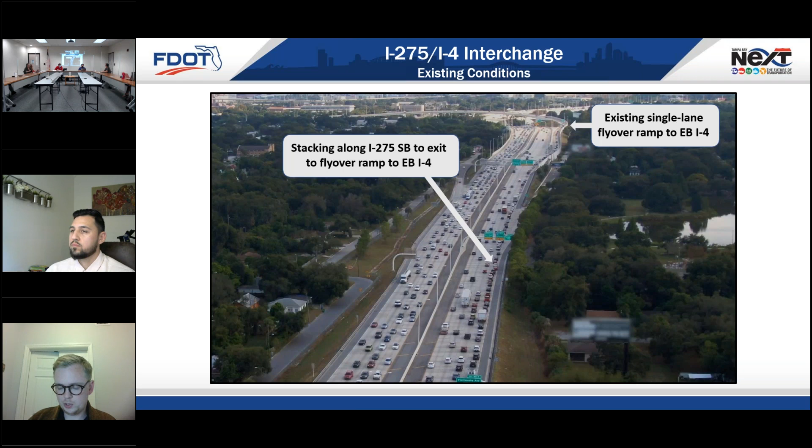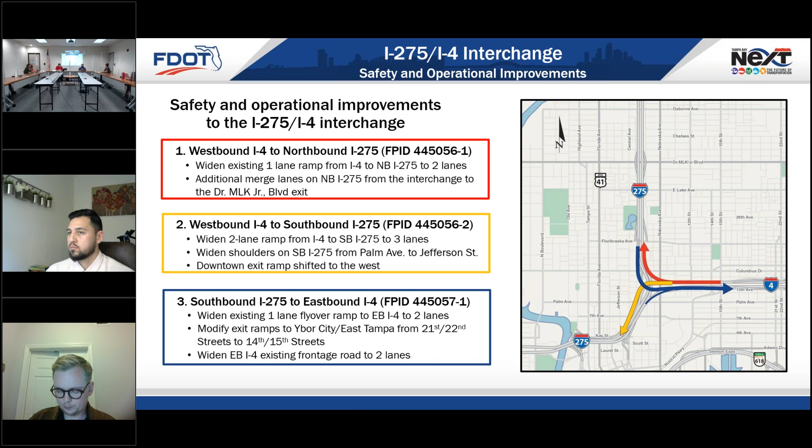These quick fix safety and operational adjustments will reduce the previously stated lane weaving and speeding, the congestion and lining up for the I-4 exit, and improve access to the local exits.

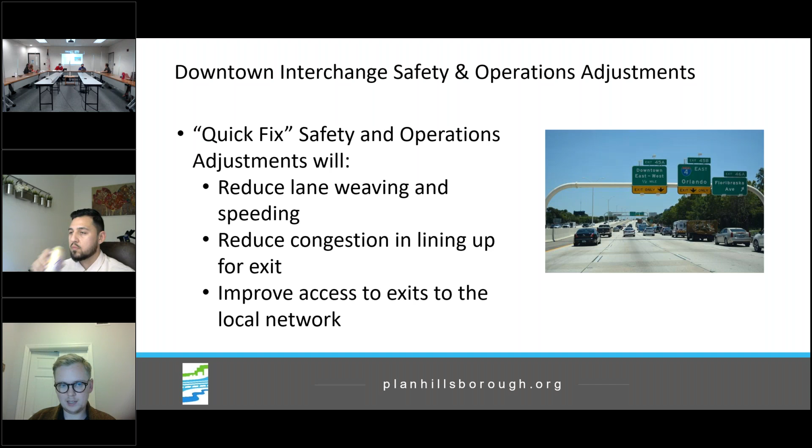FDOT is measuring that the downtown interchange will reduce deaths and serious injuries on I-275 near I-4 by nearly half, and a 14% traffic reduction on local streets.

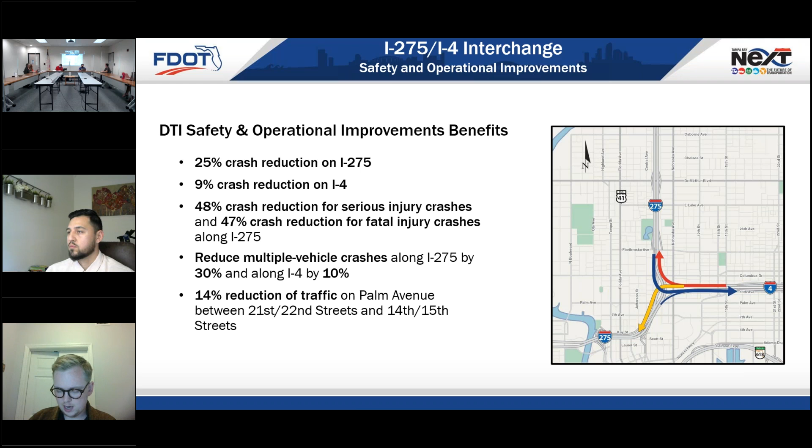Continuing on the topic of traffic reduction on local streets, the downtown interchange is also planned to improve connectivity and safety on the local street network below. There's a proposed trail system that will connect the Tampa Heights Green Spine project to Ybor and Encore development. Further, these improvements will complete streets under the interstate to connect these communities.

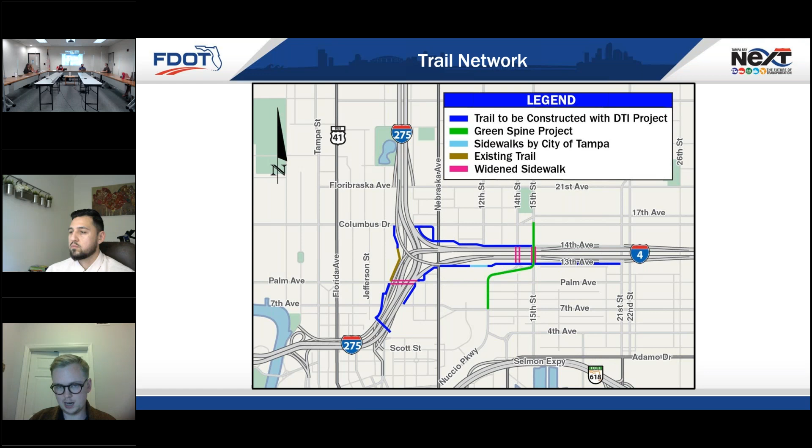The TIP amendments also intend to relieve some issues on the local network, like drivers driving too fast on and off the interstate ramps and difficulty seeing at night. Some mitigation strategies include reduced lane widths and having a high emphasis on crosswalk markings on 14th Street from Columbus Drive to 14th Avenue and 14th Street from 14th Avenue to 13th Avenue.

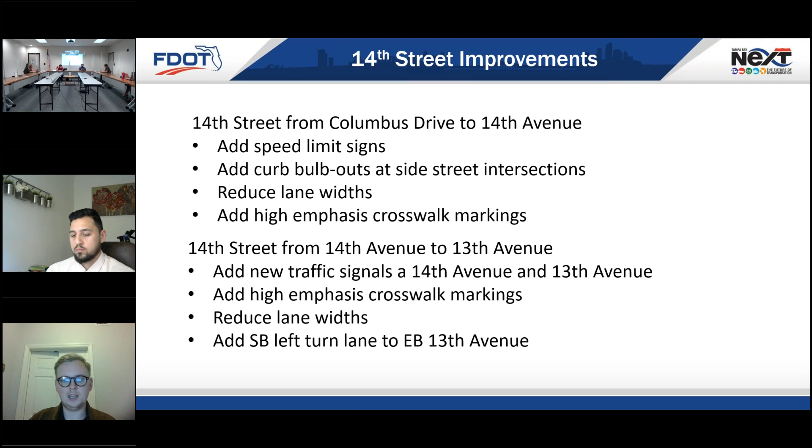This slide shows the typical street sections for 14th and 15th Street. While FDOT is responsible for working on 14th Street, the City of Tampa has plans to improve 15th Street through a green spine project. These changes include sidewalk width changing from 5 to 6 feet and lanes being narrowed.

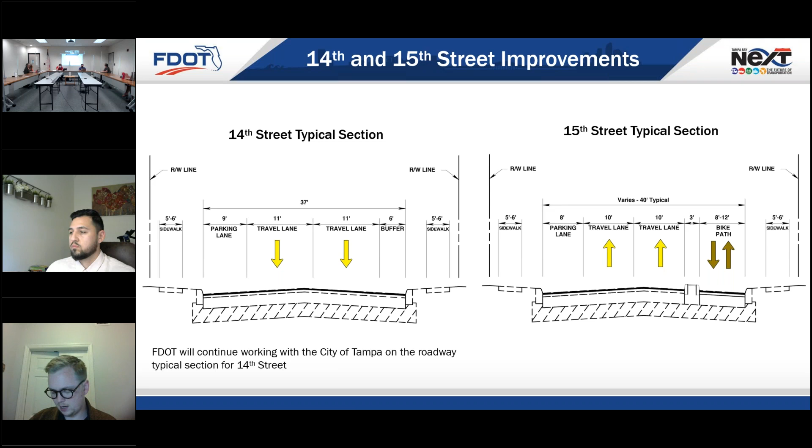So this is the first amendment. This is what was adopted and then amended for roughly $26 million. It's amended from right-of-way acquisition to right-of-way and utilities, preliminary engineering, environmental care, and design build for a total of $26 million. This section is the westbound I-4 to northbound I-275.

The next amendment is an addition of $60 million for westbound I-4 to southbound I-275. And the third amendment is the downtown interchange project adding $66 million for the I-275 southbound off-ramp to I-4. These three amendments make up for roughly $154 million.

The next group of amendments make up the West Shore interchange reconstruction preliminary phase. These 5 projects are preliminary projects that make up for 1 out of 4 phases of the West Shore interchange. The West Shore Interchange has been a top regional priority for many years, and the changes are intended to reduce congestion and weaving at the intersection of State Road 60 and I-275. This will also complement the Howard Frankland Bridge reconstruction.

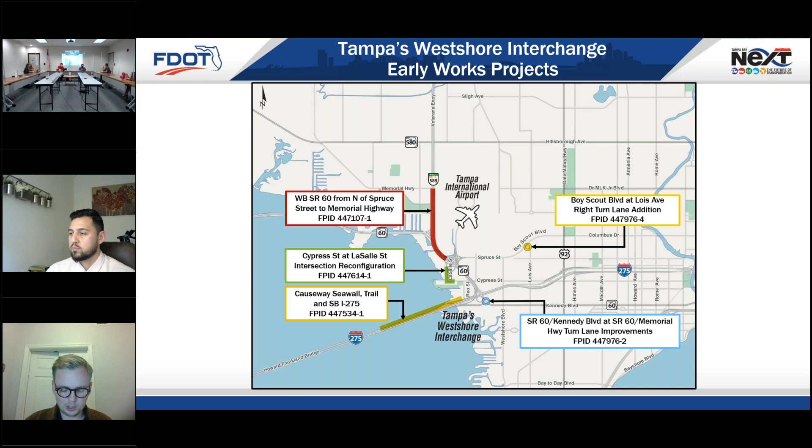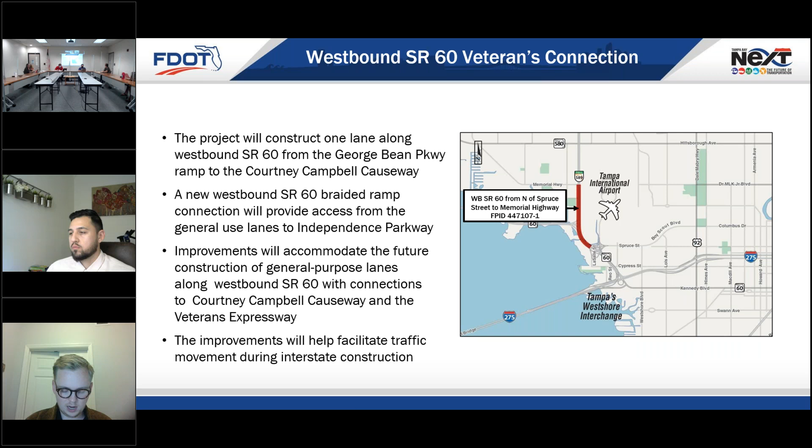The first project, westbound State Road 60, will construct one lane along westbound State Road 60 from the George Bean Parkway to Courtney Campbell Causeway. This project has a total of around $36 million for utilities, preliminary engineering, environmental care, and the design build.

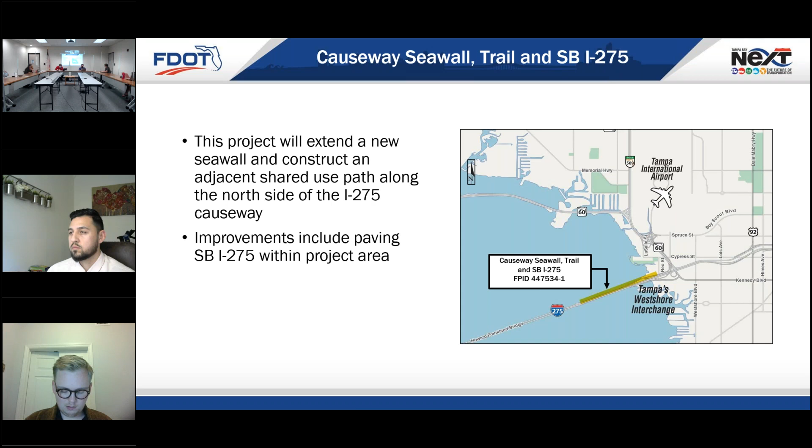The next project in this set of amendments will extend a new seawall and construct an adjacent shared use path along the north side of the I-275 causeway. This project has a total of nearly $37 million.

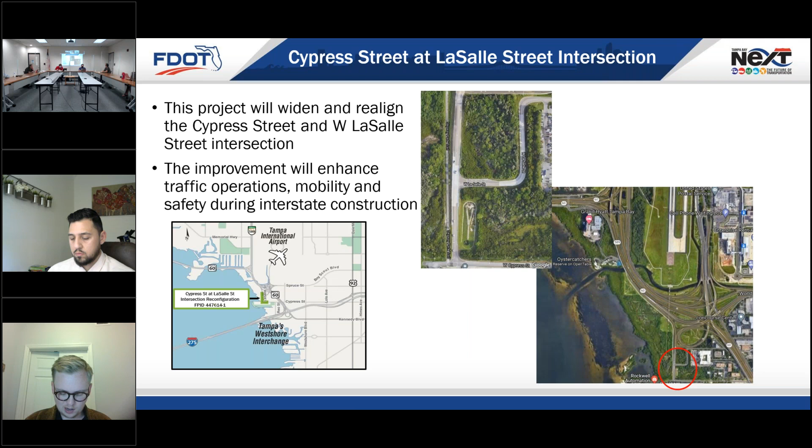The next project is Cypress at LaSalle Street. These two low volume roads are near business parks. They will be widened to enhance connectivity to two off-ramps and one on-ramp to the Westshore Tampa International Interchange. The project cost is estimated at $3.6 million.

Amendment 13 is West Kennedy Boulevard at Memorial Highway. It will allow for the construction of additional left and right turn lanes, one from eastbound Kennedy to eastbound Kennedy, the other from westbound Kennedy to westbound Kennedy. FDOT believes this will also facilitate traffic and mobility during future interstate construction, and the project has a total of nearly $2 million.

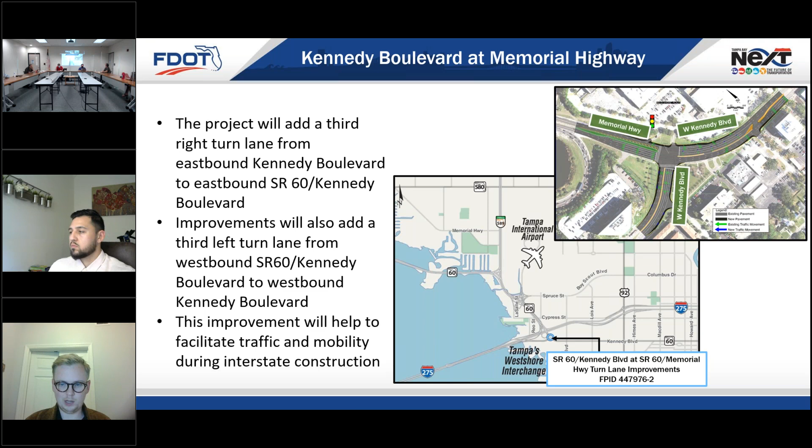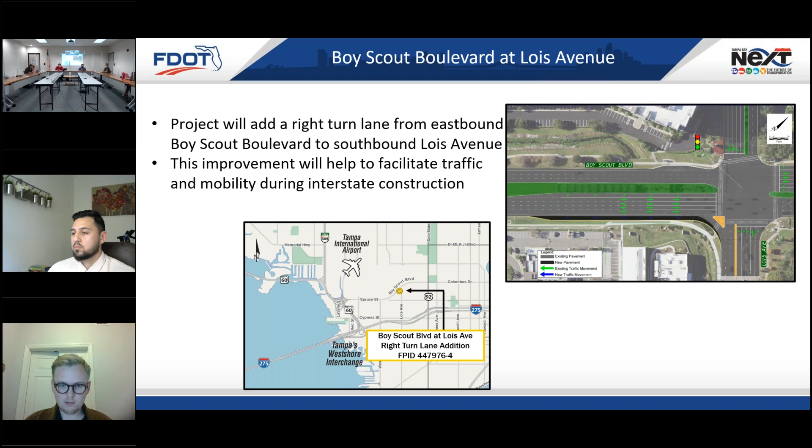The final Westshore Interchange amendment is a project to add a right turn lane from eastbound Boy Scout Boulevard to southbound Lois Avenue. This project has a total of around $527,000.

Finally, the integrated corridor management, or traffic congestion management technology, will allow a traffic control management center to manage congestion among several key corridors. These corridors include Nebraska Avenue, Tampa Street or Florida Avenue, Hillsborough Avenue, Dr. MLK Jr. Boulevard, Boy Scout Boulevard, and Kennedy Boulevard.

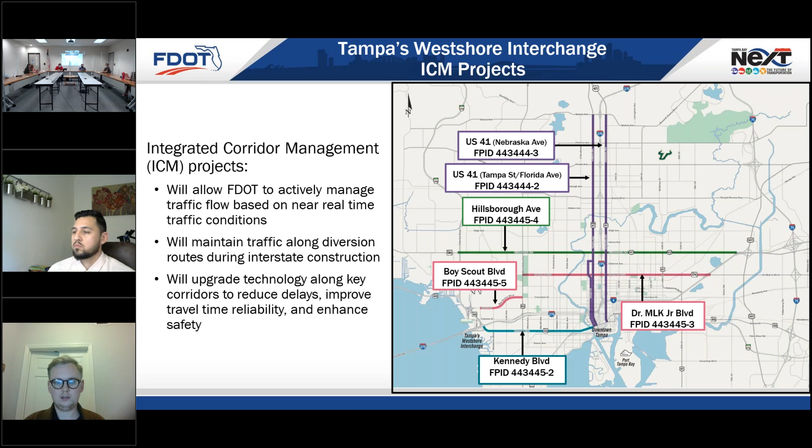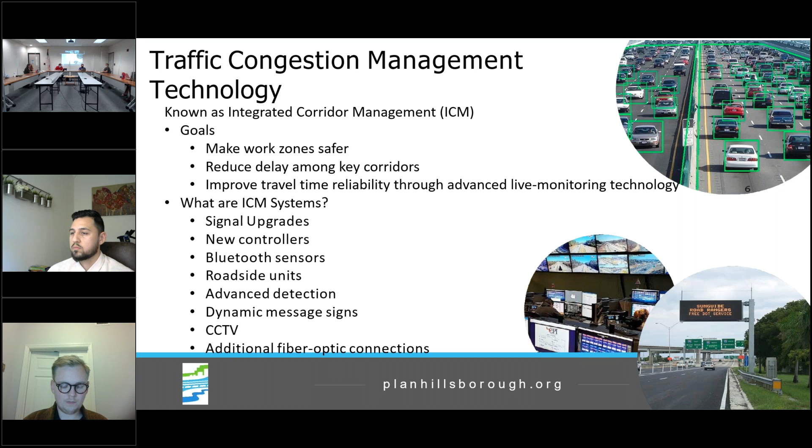These systems include advanced detection monitoring systems, dynamic message signs, and closed circuit television. They have the goal of making work zones safer and improving travel time reliability. Ultimately, they will deploy technology to allow engineers to see what's happening with traffic in real time. The first of these amendments is roughly $5 million for design and build on Florida Avenue or Tampa Street.

The next is roughly $6 million for Nebraska Avenue from Kennedy Boulevard to Bearss Avenue. The third amendment is to change funds, roughly $4 million for design build of ITS systems on Kennedy Boulevard from West Memorial Highway to Ashley Drive.

The fourth is Amendment 18 for funding, including $3.8 million of ITS systems on Dr. MLK Jr. Boulevard. The fifth is for $3.3 million for ITS systems on Hillsborough Avenue. And finally, the sixth in this set, the 20th amendment, is for $1.6 million for ITS systems on Boy Scout Boulevard from Airport Service Road to Dale Mabry Highway.

As part of our public participation pilot, we're aiming to ensure the public has had the opportunity to voice their concerns and support before they come before the committees and board. One of our outreach projects came from the Long Range Transportation Plan outreach survey, which received 5,200 responses. In this survey, respondents were given 4 options regarding the downtown interchange reconstruction. While the no-build score was higher in downtown areas and the full rebuild rating was higher in ex-urban areas, the safety and traffic quick fix option had the highest star rating overall and was supported or unopposed by most zip codes.

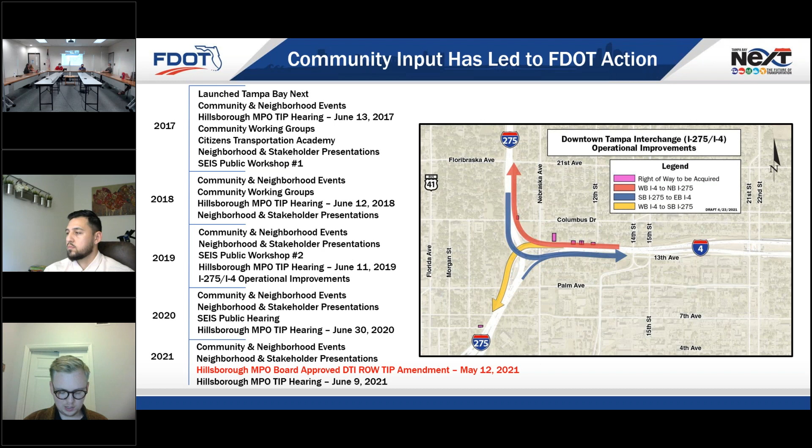As part of the pilot, we also asked jurisdictions what sort of public outreach they have done. FDOT, in this case, has done significant outreach regarding the downtown interchange since 2017. This has involved a series of community and neighborhood events, community working groups, and neighborhood and stakeholder presentations. As part of the pilot outreach, the TPO has also done outreach for these projects. We posted 6 signs along the proposed projects and also conducted social media outreach.

With that, the recommended action today is to approve the amendments to the fiscal year 2021-2022 TIP and recommend approval to the TPO board. I'd also like to provide Ms. Godfrey's information—she's a project manager for the Tampa Bay Next project—and my information as well. With that, I open the floor for any comments or questions.

Okay, great, thank you, Connor. As I mentioned, this is covering some large scale projects. So is there any comments from the committee at this point? I'll wait till the meeting members. Yeah, I'll give everyone a minute.

For me personally, I know we've seen most of these changes. This looks more in regards to budget and so forth. So I can't say enough—I speak for everybody—that the designs to try to improve the interchange at I-4 and 275 would be definitely needed, just from observation in multiple different directions. So I'm glad that it's continuing to move forward.

They did mention in the summary that you would address questions regarding noise walls, landscaping, and walkway treatments. You kind of covered the trails and so forth. I don't know if you're ready right now to speak about the noise walls, but if you are, great. If not, for me personally, I want to make sure those items remain a focus. Specifically for the community, the residents in that area—the noise walls can definitely improve their quality of life, and more evidence about landscaping around these roadways and their benefits is being shown. So certainly any opportunities to add landscaping, we would like to see endorsed and moved forward.

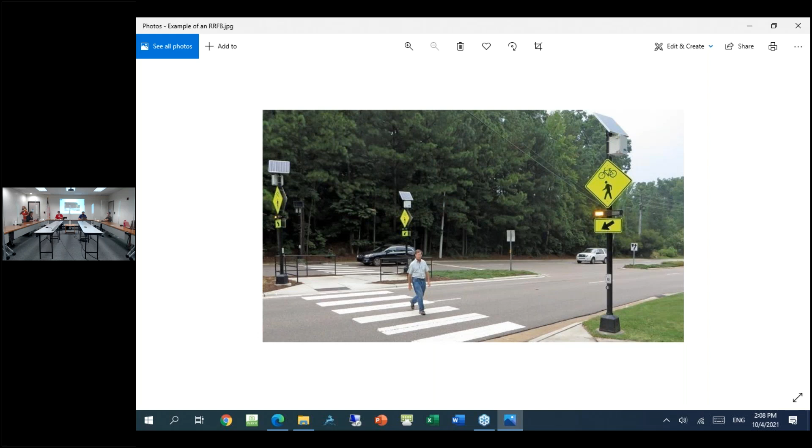Okay, so we're through the action items now, and we're ready to go on to status reports. The first one up is the FDOT freight update. So Mike, if Brian Hunter is ready, I think we'll hand the screen over to him. Brian, are you there? I didn't remember seeing you.

So my name is Brian Hunter. I'm with the Florida Department of Transportation. I'm the freight coordinator in the Office of Modal Development. So the mission of the Department of Transportation includes the need for us to ensure the safe and reliable mobility of people and goods.

The goods movement industry here in the state of Florida supports 1.75 million jobs. And so in order to support that investment, we've undertaken a number of initiatives recently. Today I'm going to give you a recap of some of those initiatives. If you have any questions, feel free to ask.

So the first of those is we recently updated our freight priorities. We had done this back in 2018, and we took a new look at them, incorporated some of the improvements that have already been made, and we broke them out into two categories this time so we could better focus on the capacity improvements as well as operational improvements.

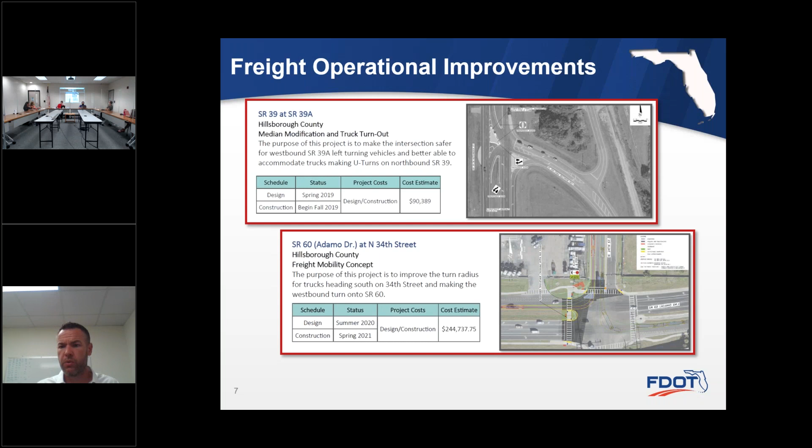We are also going to resurface the intersection. You can see it in the darker color because there's pretty severe rutting out there - some of those ruts are 6 to 8 inches deep.

So this is the before and after for State Road 39 at 39A. This was completed last year. On the left-hand side, you can see the before condition, and on the right-hand side, you can see the after, where we put in the median island and the pavement bulb-out.

The one at State Road 60 at 34th is in design right now and should go out to construction in the next couple of months.

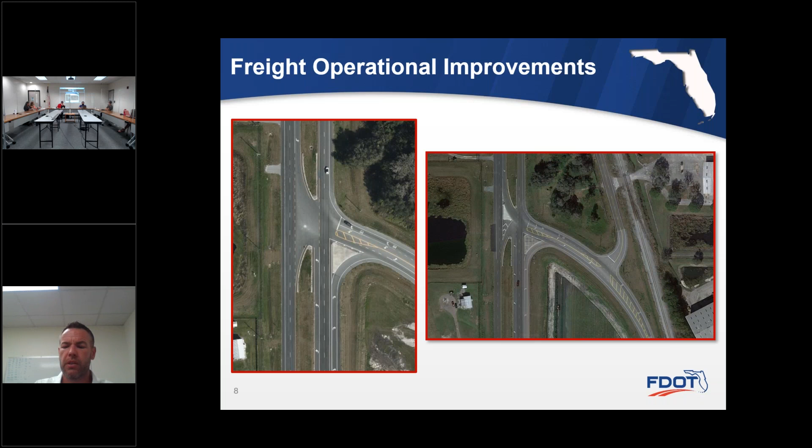Another thing we've been undertaking is freight sub-area studies. We've done 2 of them so far, and the intent is to look at areas with pretty heavy industrial activity, look at the existing activity, and what types of improvements we need to support it, since these are older industrial buildings in these areas.

Industrial development has really changed in the last 10 to 15 years. We used to have 20-foot clear height as the standard; now we're looking at 40 feet inside these buildings. They've also quadrupled the amount of truck bays that each warehouse will have.

So we have areas with industrial properties reaching the end of their useful life. What happens if those are redeveloped? What is going to happen to the transportation network? What improvements will we need to make then?

We go into these areas and analyze existing and future conditions, then come up with a list of proposed improvements. Some we'll address through the push button design build if they're relatively small. If they're a little larger and there's a construction project going through on the corridor, we'll try to incorporate them there. If not, maybe we create a separate project.

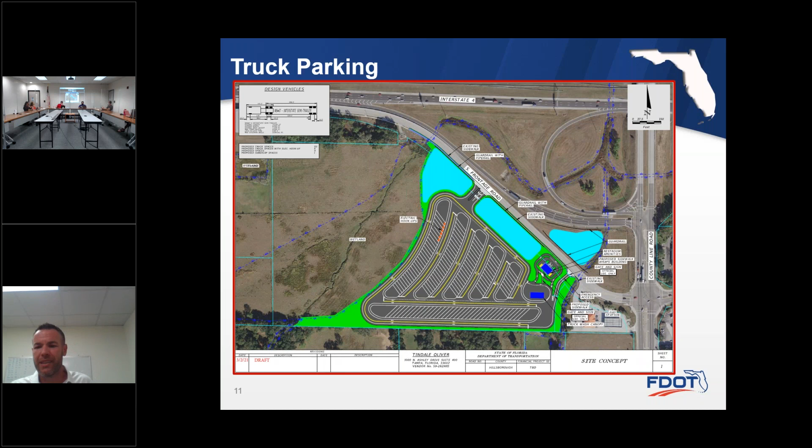So we're using some SIS quick fix connector funds to make improvements to that road. We're partnering with the City of Tampa - they've been a great partner helping us move this forward. We're going to resurface the road, make a lot of drainage improvements, and put a 12-foot concrete shared use path on the west side.

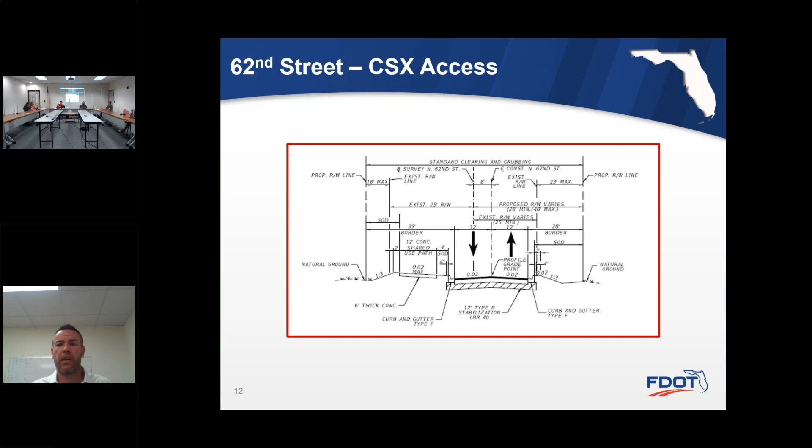And then, as always, we like to end these with a safety message. If you drive, you're going to have interactions with trucks, and they have much different operating characteristics than cars do. So their blind spots are pretty big. Please do not hang out in the no zone. I know you guys have seen all this before, but it's an important reminder and something to keep in mind when you're out there.

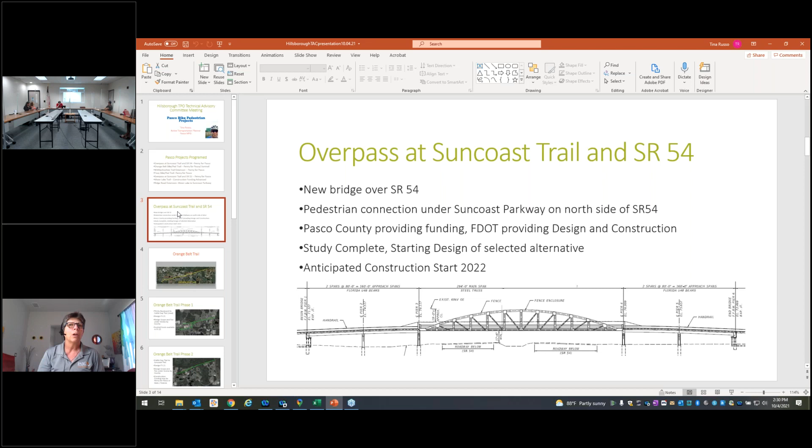The next one is our Orange Belt Trail, with several different segments. The original concept would run all the way from the southwest corner of Pasco County, at the Pinellas County line, up to the northeast corner and connect to the Withlacoochee. We have a current project, the Withlacoochee extension, connecting the Hardy Trail to the Withlacoochee at 301. These three segments are funded, which will get us to the Suncoast Trail. We have a Sun Trail application in for the piece going over Suncoast Parkway, making that other connection to the east.

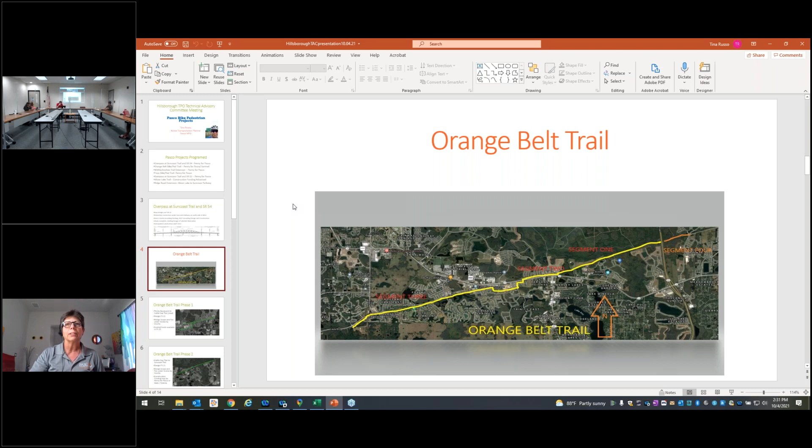This is that first phase we're talking about, the piece that follows Trinity Boulevard to Cattle Gap, behind the Publix near Gunn Highway. This is in design right now, using Sun Trail funds available in fiscal year 25 for construction. We'll have a mid-block crossing of 54 just east of Community Drive. We're trying to avoid building overpasses for our projects from this point on, if we can, by design.

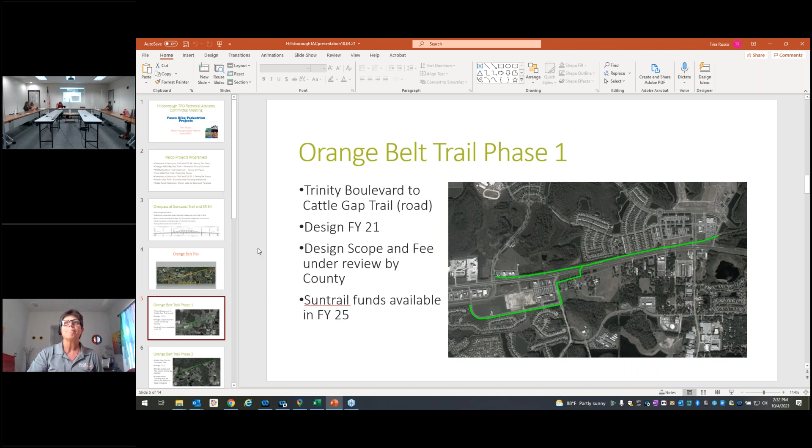And that second piece is the next piece connecting from that piece I just showed you, which will be basically parallel with 54 and just north of it, and it will connect Starkey Ranch development with several different facilities, multi-use path, bike lanes, and that will connect to the Suncoast Trail about a mile and a half north of 54.

This is on Tampa Bay water easement. Basically, this is very similar to a future Tower Road alignment as well. We're going to build the trail first.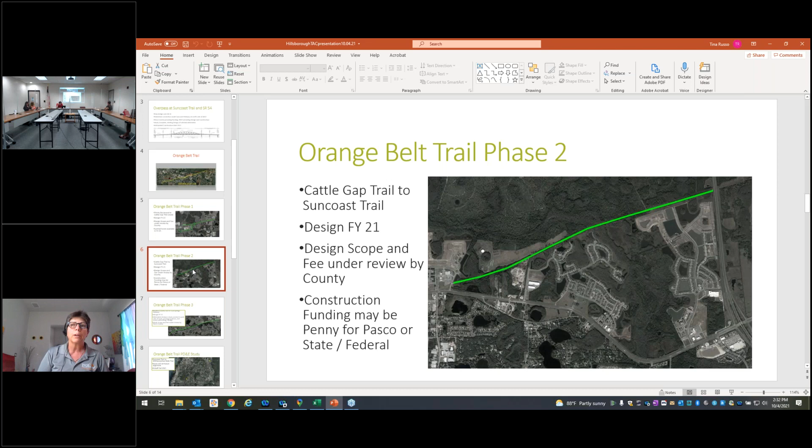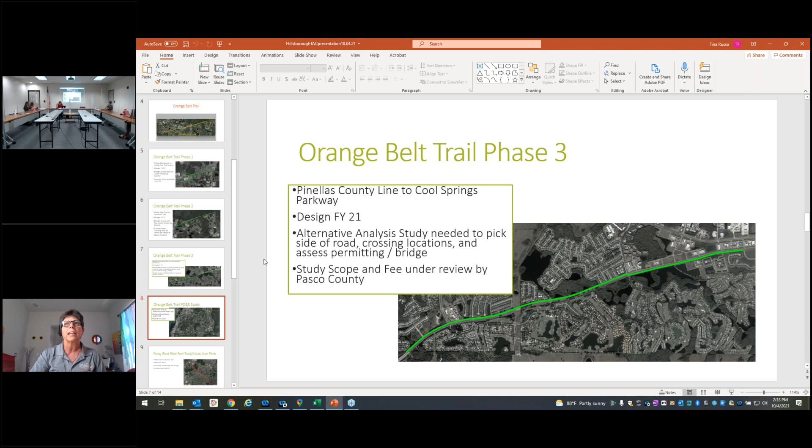And that phase 3 is the Trinity piece that goes basically from the Pinellas County line to Cool Springs Parkway. So all these three connections, three pieces, will connect together for a complete alignment of a trail. We don't want to build segments that aren't going to be connected to anything.

And then the rest of this Orange Belt Trail that I told you about - you can see those little pin drops from the southwest corner of the county to the northeast corner of the county. We have a current route study in place to try to figure out those in-between dots. Our biggest question is basically east of 75, from 52 north, to make that final connection up to that northeast corner.

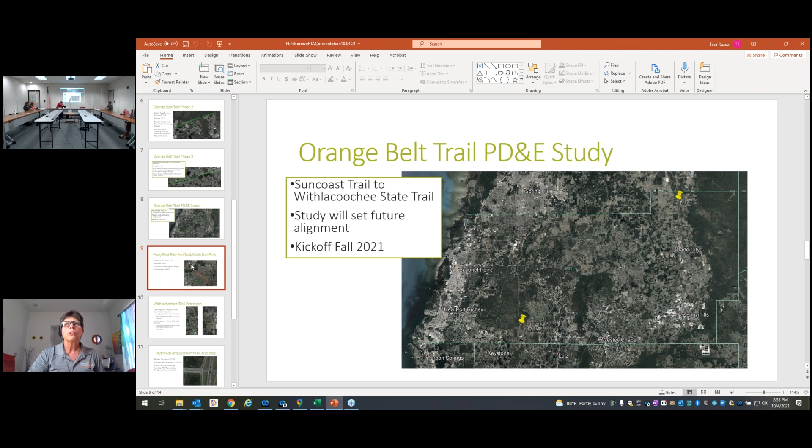A couple other smaller projects that are penny for Pasco projects. We have this Trinity Boulevard, which will actually connect Little Road to 19. The Withlacoochee Extension, which I told you about. We have a current trail called the Hardy Trail. This will be a southern piece that connects that trail to the 301 trail, and then a northern piece that will connect that Hardy Trail to the Withlacoochee Trail.

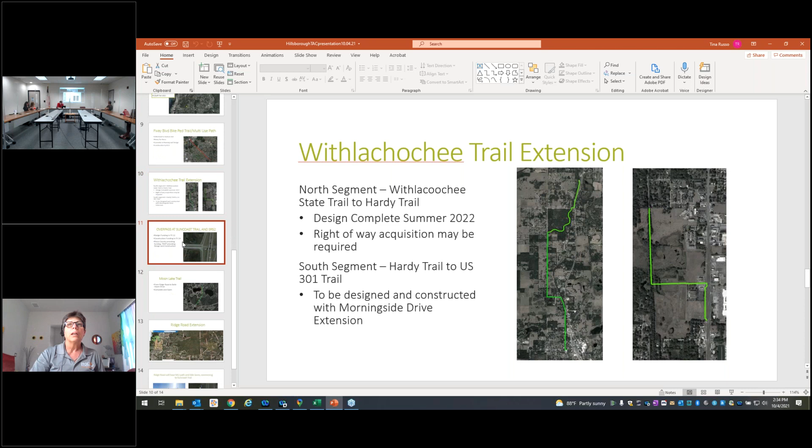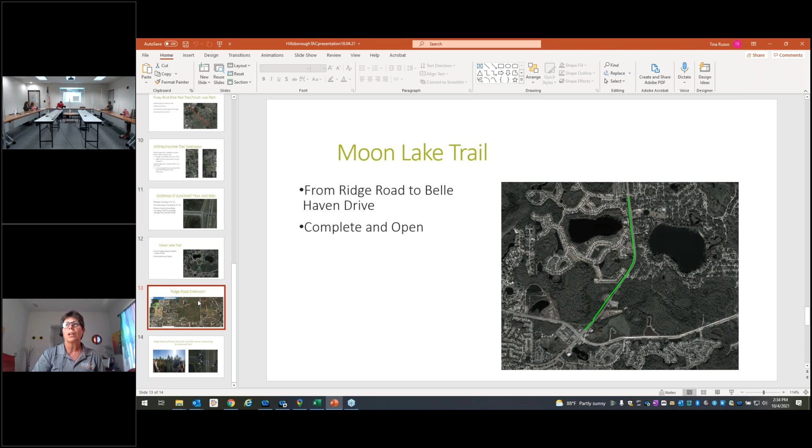Let me scoot down and get this next picture. So this is Ridge Road extension, has 15 overpasses on it. It goes through some sensitive land. It's been in the works for quite a few years.

This is the overlook at the 15th overpass as we almost get to Suncoast Parkway, and it is basically off the multi-use trail. Beautiful vista from this overlook. And then that next picture next to it is how the interchange for Ridge Road and Suncoast Trail will look in its final design. And it will all be signalized - every crossing of the trail and the roadway will be signalized by a regular signal.

And that is about it for me. If you have any questions.

You know, go ahead, Gina. I'm jealous. I just thought, I mean, Pasco has this, the Withlacoochee and the Suncoast, the Orange Belt Phase 2 that connects Starkey to the Suncoast.

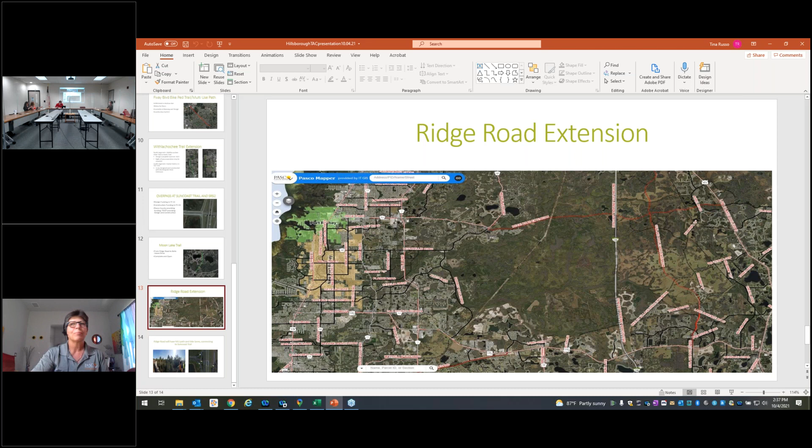Okay, great. Do we have any other questions from the committee? Can you go to the last slide, please? So the very last one.

I mean, for me, I'm certainly not nearly as familiar with Pasco County, but kind of like Gina, it's exciting to see all the projects you have going on. And certainly I represent the environmental group, our agency locally here, so we endorse trails and people getting out and not driving combustion engines and getting exercise. So, obviously my one comment as the chair of this would be to do anything possible to connect these to Hillsborough trails, which I'm sure you're already doing. But it's just exciting to see it.

Yeah, I was just looking at this. That looks like - are they doing a divergent diamond on that crossing there?

So it was a lot of different hoops to jump through to get this interchange done correctly. The engineer on our project, Sam Bennett, just won Bicycle Professional of the Year award for FBA, and he's done a tremendous job working on these intersections. We all know on and off ramps are tricky to negotiate when cycling, especially on the Suncoast Trail, where people are used to 10 miles without a single stop. So we're trying to make it as safe as possible.